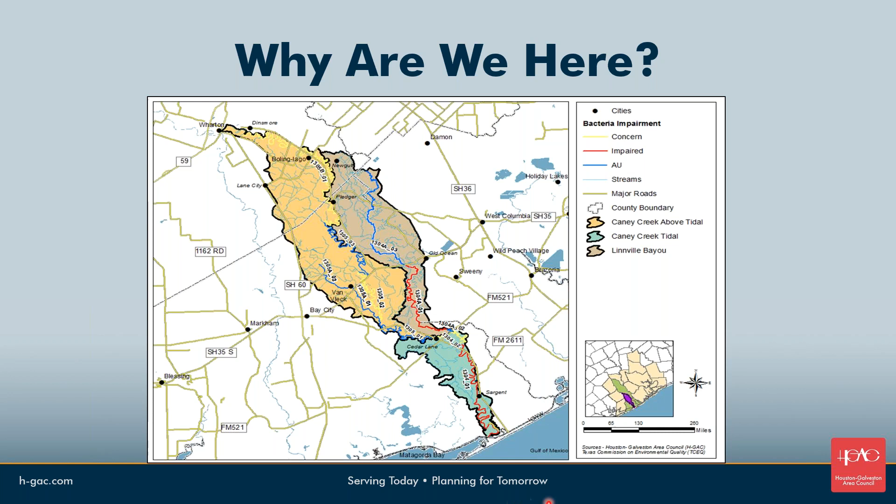The status of projects in terms of where we're at, just a quick review of the meetings we've had so far. We've had 4 coordination committee meetings prior to this one being the 5th. The first and second one were really kind of kickoff meetings where we tried to identify stakeholders and encourage those stakeholders to potentially participate going forward. I thank you, John, as a participant of that meeting number 2, and you've continued to constantly come to meetings as we've proceeded through these.

I really appreciate that. Meeting 3, we focused on best management practices and management measures, and I asked the group to take a survey, and we then, in meeting 4, reviewed that survey results. This meeting, we're kind of backtracking a little bit to 4 and talking about those results, but really focused again on those management measures. And again, we'd hope to get a few more of the coordination committee members on. We'll continue to try to do that going forward and hopefully keep this process moving.

The TMDL update for documents that are going into the TMDL program. Again, there are 2 documents that go into the EPA. Principally, there's a technical support document, which essentially characterizes the water body, gives all the kind of details that are then sort of summarized into a TMDL document itself, which is more the document that goes to the EPA for them to approve moving forward with reducing bacteria and to address the issue of impaired waters. It's a reporting process for the EPA in terms of what TCEQ sends to them, and that goes through the commission and then goes up to EPA. So that TMDL document needs to go there.

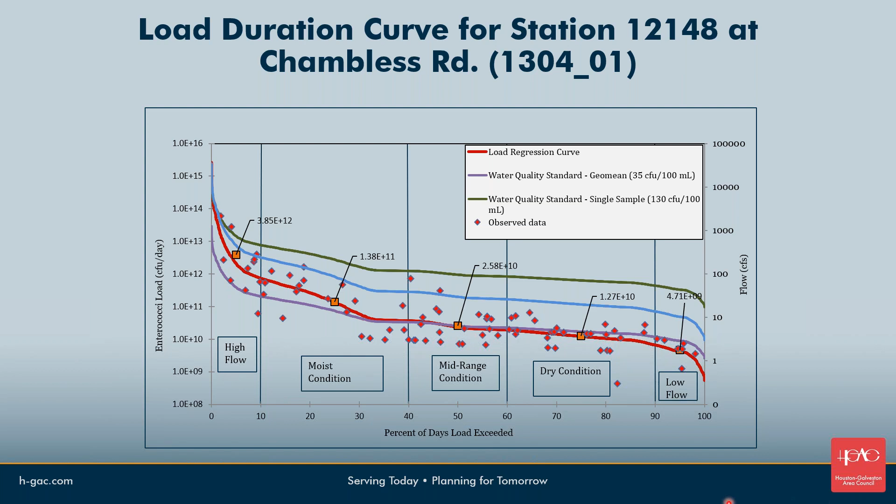So again, if we took these orange squares, we could look at the difference between this square and the purple, and say that's the load reduction value needed, and place that on this table here. Looking at it from high flow conditions, we typically see the largest reduction needed. As we move down, it gets closer to the standard. And in the case of 130401, we actually cross over at the mid-range condition, and at that point we don't need any additional reduction to meet the standard.

If you recall 1304A01, we're pretty much above the standard throughout the curve, and therefore reduction needs to take place throughout the curve. Again, if we focus primarily on this higher value, if we reduce the overall load at that point, we probably are going to correct for all of these other conditions too. So when we look at a total maximum daily load, we typically use the value at the high flow condition to set the total maximum daily load.

So the TMDL was done. Again, we just focused on the TMDL for those two impaired AUs. We actually did calculations for the other AUs where we had sufficient data, and we'll be using that for the management measures, which we'll talk about in just a bit. But the TMDL requires us to focus on those impaired AUs, and so we focused on 1304-01 and 1304A-01.

And again, this is at the 5% mark in the high flow conditions. We took the central TMDL, which is a basis of where that standard curve is at the 5%. That's the value that you'll see there at 387.70 billion CFU per day, or in the case of Enterococcus 387, or E. coli 268.66.

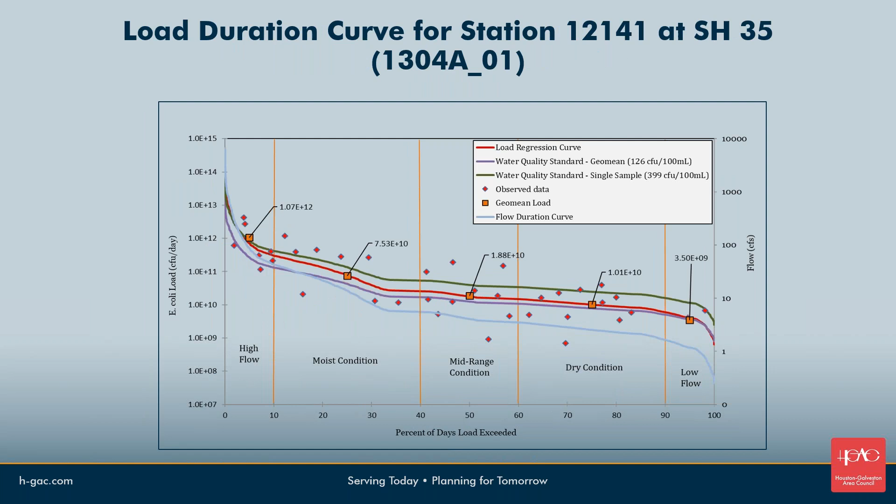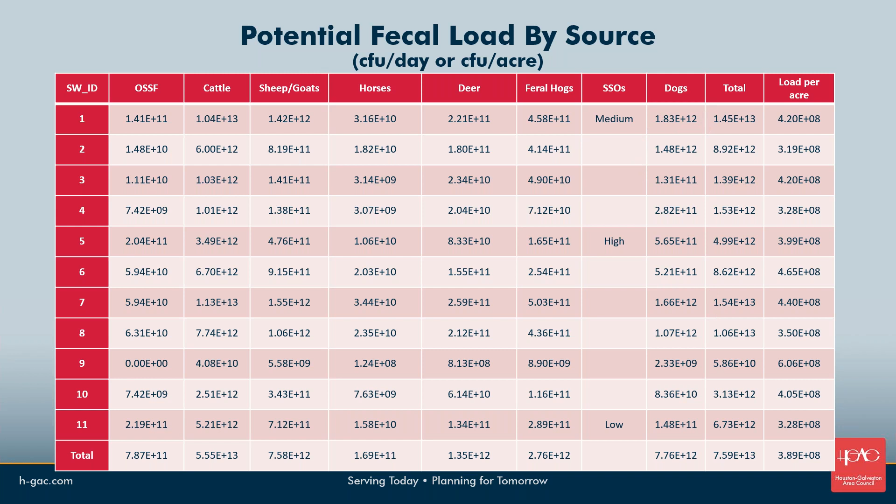So we'll use that percentage, that sub-watershed value, in this case of dogs, to look at the percentage of that load reduction across each of these sub-watersheds. The challenge being that we do not have information to do that for each of these. So in the case of sub-watersheds 1, 2, and 3, we have an assessment unit monitoring station that we had sufficient data here at sub-watershed 3. We had to then look at the percentage each of these sub-watersheds makes into that load reduction value. So that step was done prior to segregating the across the board percentage of, say, dog or feral hog or whatnot to arrive at the value for each of these contributing to each sub-watershed.

So once we have a value for each of these of a load reduction by source, we could then calculate out the number of units that we would have to address in each sub-watershed to meet the standard. And we'll talk about that as we move into management measures next.

So I mentioned that back in July of 2019, we did a management measure questionnaire with the coordination committee. In that questionnaire, we had several high-level topics. In each of these topic areas, we also had individual activities that could be carried out, and those were also scored by the stakeholders that were there at that meeting. We asked in that questionnaire, is it a watershed concern? And so in the case of domesticated animals representing ag producing sources, yes, and then moving on down the list, manure application and pet waste were considered not really to be a concern for the watershed.

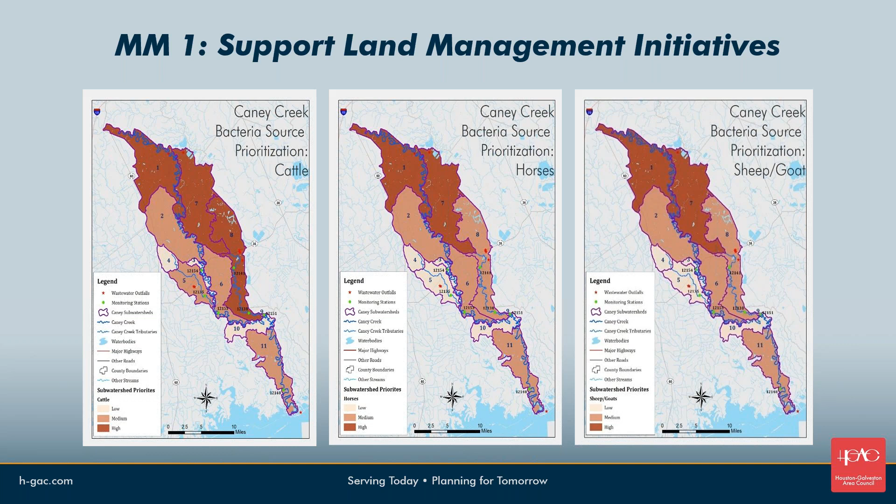So we have, again, values for cattle, sheep, goats, and horses. We again looked at it from both the loading side in terms of how many cattle, sheep, goats, and horses fit in each of these sub-watersheds. Then we also looked at it by turning it around and going down the load reduction side to look at how many need to be reduced potentially in a given watershed. One point to note here is we're not advocating removing 317 horses, sheep, goats, cattle from subwatershed 1.

We are actually recommending, and we worked through with NRCS, Natural Resource Conservation Service, and the Texas State Soil and Water Conservation Board on their conservation management plans and water quality management plans, looking at how many livestock would be addressed by a particular management plan. And a general rule of thumb for them is 50. And so if you're looking at a management plan that addresses 50, that would be how you would arrive then at the number of livestock you're addressing and how many plans you would create to address those.

And when we talk about livestock management plans, we're talking about things like fencing to fence off the water body from cattle direct deposits. You're looking at alternative water sources. So you removed that water source by fencing. What are some alternative water sources to help the landowner and the cattle obviously have water to drink? You're looking at maintaining filter strips, green riparian zones to help also provide additional removal of any bacteria or sediments or those kinds of things. So that's part of what goes in a plan that you create for this.

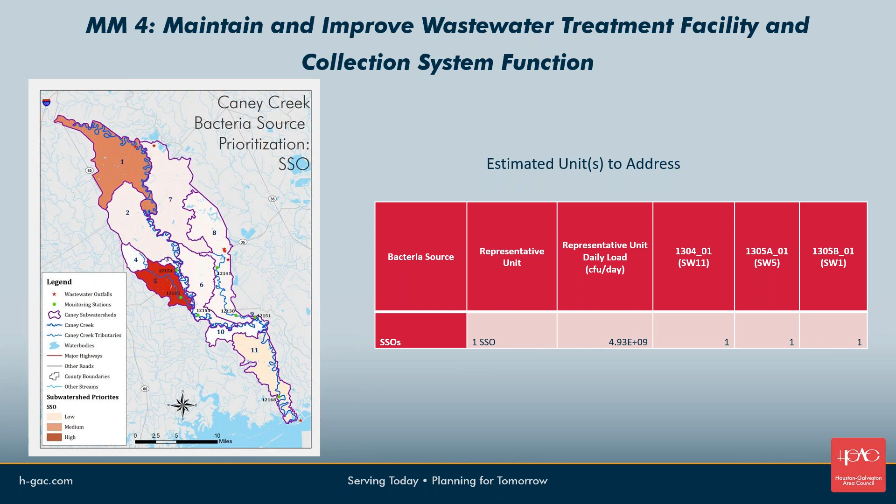So looking at how you would improve the sanitary sewer collection system and wastewater treatment facilities and maintain them. Again, a lot of it's to identify wastewater treatment facilities with chronic problems. There really aren't those, but we can provide technical assistance. I know at least one of the wastewater treatment facilities is for a mobile home park in the Van Vleck area. So there's opportunities for technical assistance if needed. We can certainly provide that.

Identify areas where collection system I&I or aging infrastructure is a problem. Again, data doesn't necessarily support that there's that need, but we certainly can work with those permit holders to see if there's opportunities that they'd like to try to apply there, and reach out to them.

The other side of it is providing fats, oils, and grease (FOG) information to utility customers, working through the permit holders and their customers to get that information out to ensure that we don't have sanitary sewer overflows in the future. So then I'll leave this up for a little bit for y'all to review. There's a lot more information on here.

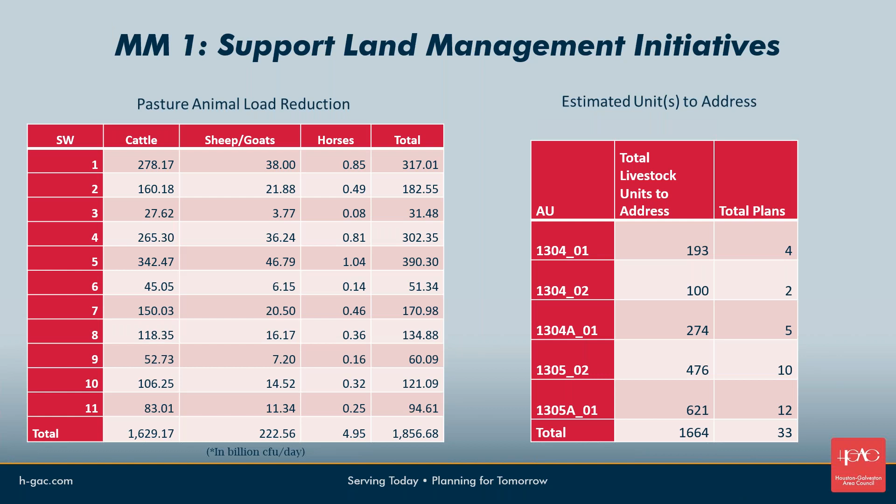Make sure I got that correct. 33, I'm sorry, it's a fair amount in terms of management plans. So focusing on both of those, I think, is certainly the best. If I was to say where we want to put our funding, that would be it.

And I do apologize for the technical difficulties. Everybody is unmuted now if they'd like to be. Any other questions? All right, let's move into the watershed protection plan. Anybody have a question?

I'm trying to follow which question or which chart. He said go back. No, I was wondering which chart or what I should share with folks. I missed it. There was a chart when you guys were talking about the samples that need to be more current, and he said that the chart showed 07-14. So when you guys were talking about some numbers, that maybe the chart didn't match what exactly you were talking about, possibly. Okay, so I think I know which table. We have two tables in here talking about data, and we'll go to those two, and maybe I can clear this up.

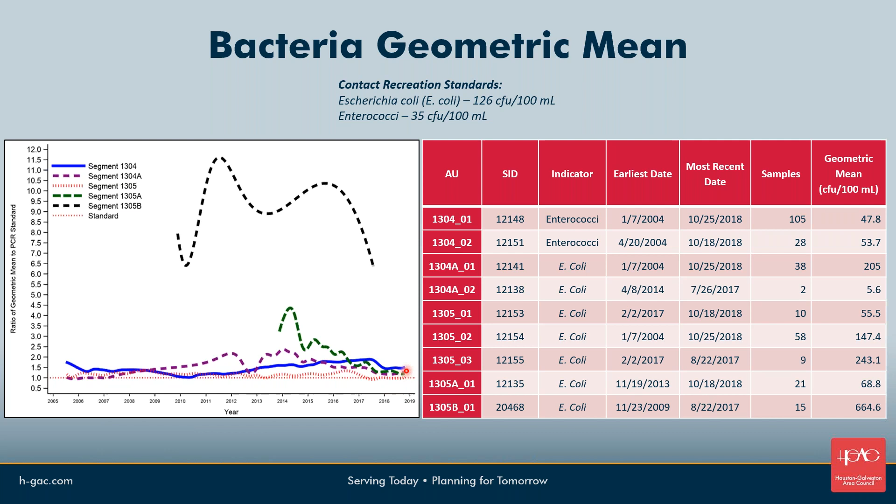So we presented this here so that you have the full record of data, at least that we had used in the technical support document. And again, we try to keep adding data as we go forward. But a lot of that doesn't necessarily change the direction of the trend. Again, I think we're still probably looking at being in the same place as we add more data, but we'll continue to do that going forward.

So then when you look at the integrated report, again, this was the report that was available when we were doing the technical support document. The 2018 draft was finalized this year. And again, 2020, they're currently working on as a draft. It will probably be either done in the fall or just slightly later into 2021. Again, that'll cover data all the way through 2018.

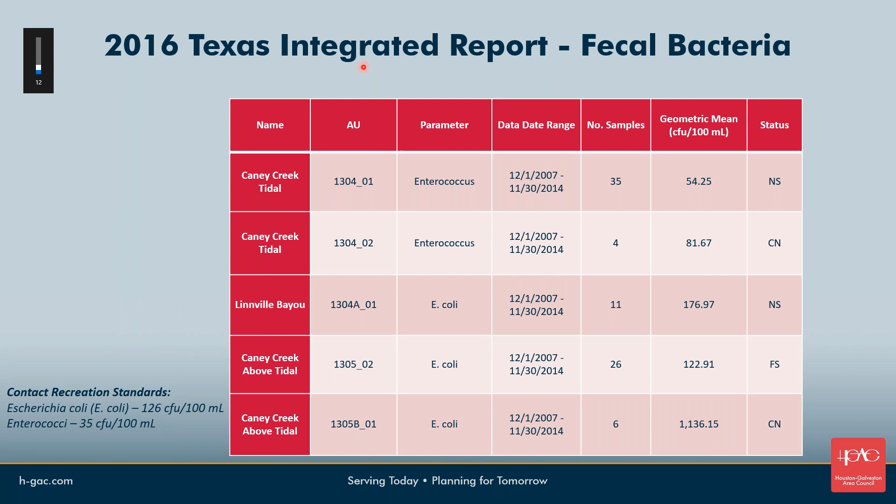Steve, so can I break in? Yeah, go ahead. I'll just mention that for the TMDL document itself, we have included the 2018 draft, which includes data through 2016. We try to have the most recently approved by EPA 303(d) list information in our TMDL. So since we did the TSD, an additional one, the 2018 one, was completed, and we'll be using that for the TMDL I-Plan. Okay, thank you, Jason.

So yeah, we'll keep adding as we can, but for the purposes of the TMDL, again, they have to use the assessment that's done and completed and the latest one, and so we'll continue to work off of whatever one that is for actually addressing the total maximum daily load process. Good question. Are there any others?

All right, well then I'd like to thank you all for attending and getting us through at least this first attempt at a webinar. And as I said, I will check in with the other coordination committee members and see how we can best get them up to speed. I don't want to wait until we're allowed to have an actual in-person meeting. Again, we're all trying to work through either the concerns through our agency or the concerns through federal government or whatever about meetings. And so we'll deal with what we can deal with and do our best.

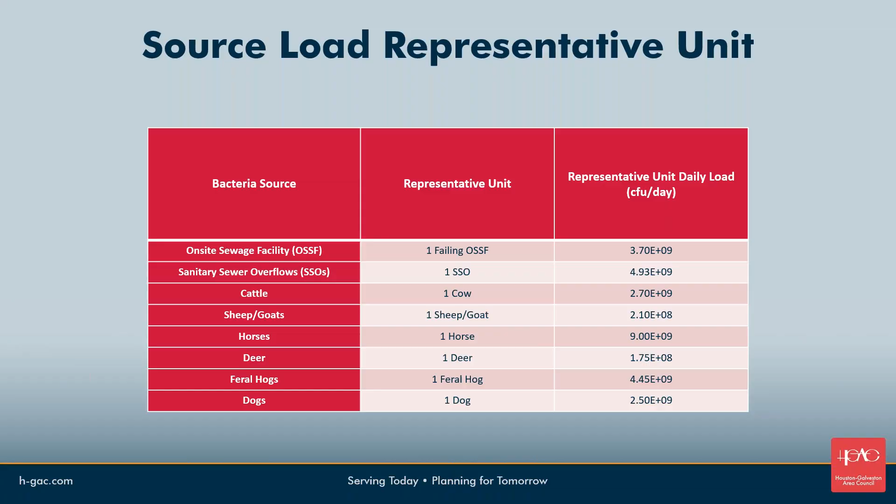Yes, I would like to talk to you after, but it doesn't have to involve everybody else. So maybe I'll just give you a call, or we can talk at the office tomorrow. Sure.